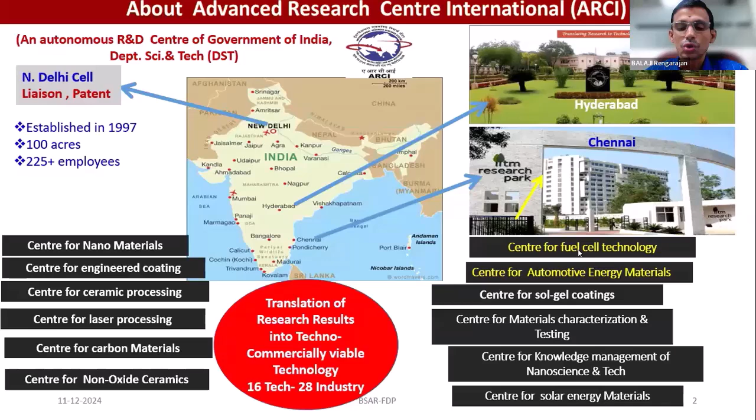Coming to our Center for Fuel Cell Technology, it is one of the Centers of Excellence of ARCI. Basically we are focusing on low temperature polymer membrane-based fuel cells for stationary and mobility applications, and another vertical we are working on is hydrogen generation through the PEM-based system. That is a major activity of our center.

Apart from that, as a kind of spin-off technology, we also work on hydrogen storage material development and metal air battery. So these are the major R&D activities taking place at our center.

Apart from that, we also have student internships as well as PhD research scholars. We take up every year depending on the project requirement, and we support them for 5 years with a full stipend, and they can register the PhD at any of the NITs and IITs in India. We have MOU with almost all the NITs and IITs in India.

So that they can register the PhD as an external candidate and work with us, and at the end of the 5th year they may have a degree from the IITs and NITs. So that kind of working model is also available, and many PhD students have obtained a PhD from our institution.

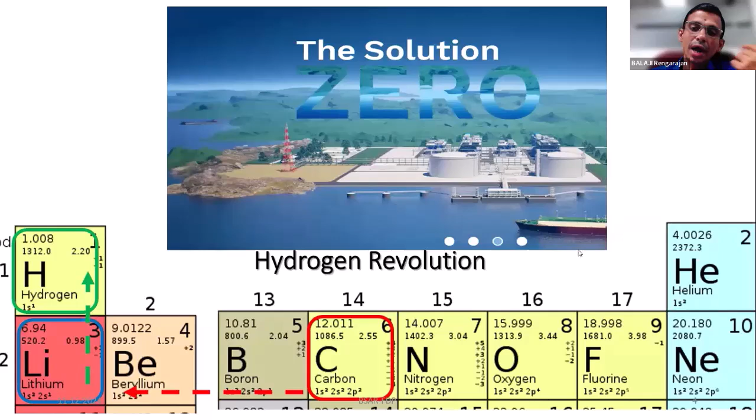Whatever power and water is input for the electrolysis, in the fuel cell, water and power are the output, with hydrogen and air as the input. So it's exactly the reverse of the green hydrogen electrolysis process. In that context, there is no carbon footprint, it is almost zero carbon footprint. That's why people are trying to move towards the hydrogen revolution and achieve the net zero target.

And recently we transferred two technologies to the industries as a component of fuel cell. Not only development of fuel cell, we also do field trials and demonstration programs almost all over India. So we have demonstrated up to 8 stationary applications and 2 transport applications.

And in fuel cell, you might have heard yesterday, the core component is membrane electrode assembly, which is the core component for fuel cell. We have very good infrastructure on developing this core component, and we developed more than 3000 MEAs, through which we can generate power of 0.2 megawatt, which has been tested for more than 8,500 hours, which is a unique number.

Because if you want to develop a technology, then ultimately we need to check the reliability and durability, endurance studies of the system which we develop. So we won't compromise on that particular aspect, and we do rigorous testing of our developed system.

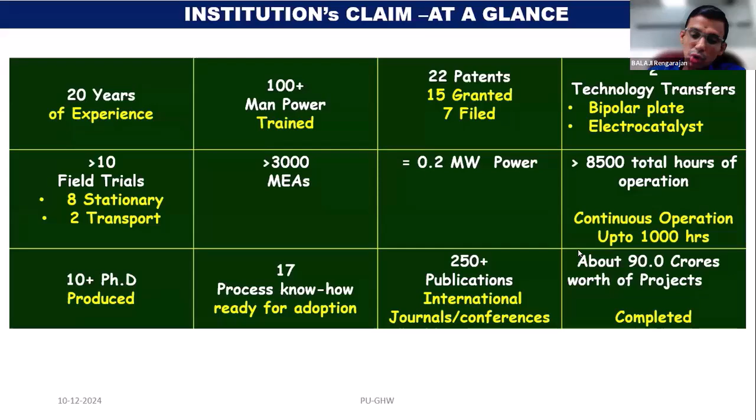And it has about 17 process know-how which we developed, and the patents and publications are quite numerous. We executed more than 90 crores worth of projects through it, in our journey over the past 20 years.

When we talk about hydrogen energy, the transition will not happen overnight. We can categorize the energy transition into 3 different scenarios: present, intermediate, and ultimate. Right now we deal with a fossil fuel based system like petrol, diesel, and natural gas. All those things are not carbon free, they emit greenhouse gases. But it's a kind of intermediate stage. We can look at electric and hybrid vehicles and synthetic fuel based vehicles, which can also generate power for stationary applications. But the ultimate objective of the entire world is to work towards hydrogen, which will have almost zero footprint when used in any kind of application.

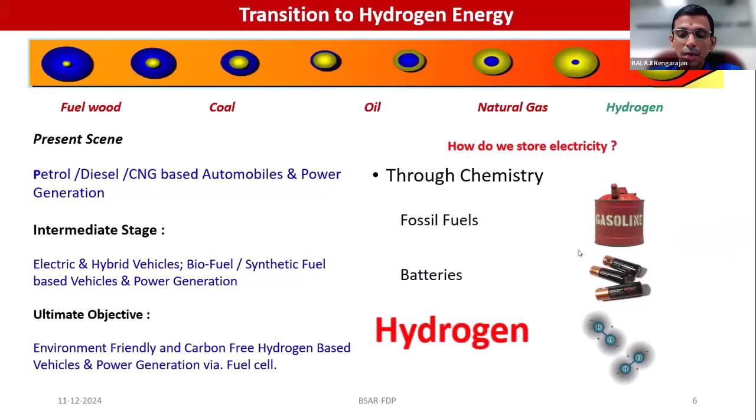But this transition won't happen overnight. All these energies are being stored through chemical reactions involved in the material aspects.

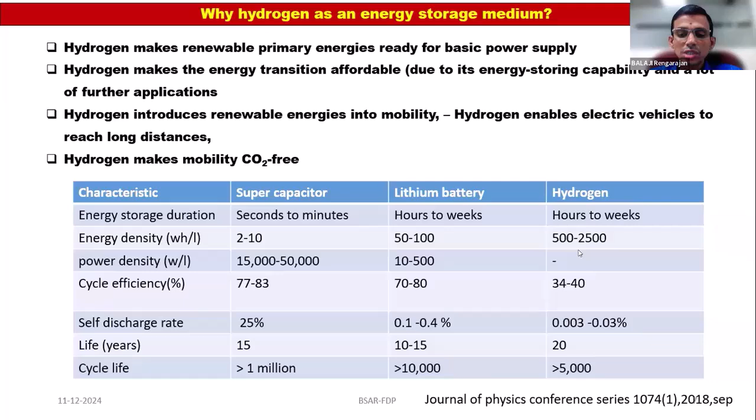So why do you want to go with hydrogen as an energy storage medium compared with other supercapacitors or lithium batteries, when we have alternative energy storage mediums? The main advantage is the energy density, which is higher than supercapacitors as well as lithium batteries. The cycle efficiency is slightly lower than supercapacitors and lithium batteries - I will talk about in detail in my subsequent slides why the cycle efficiency for the fuel cell is a little bit low compared with others. In terms of discharge rate, life, and cycle life, it's quite good, on par with supercapacitors and lithium batteries. So that is the drive for people looking towards this hydrogen-based economy.

When you talk about the hydrogen-based economy, there are 3 important steps which we need to consider. The fuel cell comes up with the utilization aspects, but before that there are 2 important steps: production and storage. These are the 2 important steps which we need to overcome if you want to use it in a fuel cell as hydrogen fuel.

When you talk about production, it is not an existing asset - it has to be generated from the electrolysis of water or some hydrocarbon. Hydrogen exists in the form of water or hydrocarbon, so you have to get the hydrogen from these 2 sources. Depending upon the feedstock and the method of recovering hydrogen, it is categorized into various types. Right now hydrogen is not new for the chemical industry, which widely uses it as a reducing agent. But when you want to use it as a kind of fuel, the demand is huge, and how you are going to handle the hydrogen when used as fuel, especially for stationary applications as well as long term storage - that is the one thing, storage is also equally critical in the case of hydrogen.

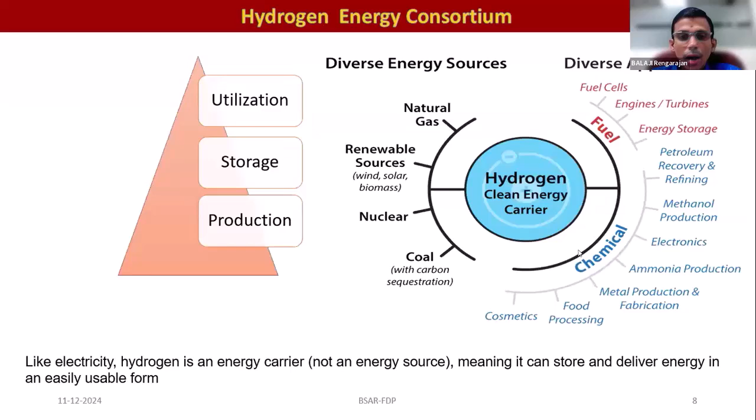These are the various hydrogen production steps based on the feedstock. Fossil fuel, if used as feedstock - especially natural gas and coal - we end up with a reformation process and gasification process, yielding hydrogen along with carbon dioxide. When you want to store this carbon emission, we have to adopt a carbon capture and storage system. If you use nuclear energy as input energy for getting hydrogen from water, there are two processes: thermochemical water splitting and high temperature electrolysis. These are the two steps available, but this technology is not highly matured because of some limitations.

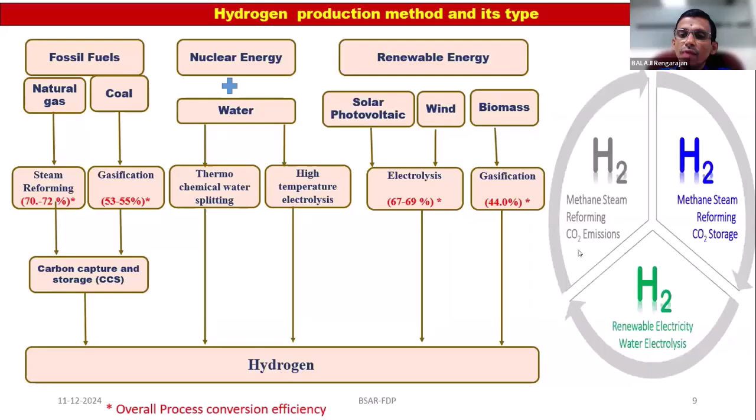That's why people are trying to use renewable energy as a source of electrical energy input for splitting water molecules. Using that electrolysis process, the efficiency is fairly good compared with the existing reformation process, and we can get pure hydrogen. This hydrogen is colorless, but depending on the type of method adopted and the emission of CO2, it is widely categorized as brown, gray, blue, and green. In the case of brown it is quite high, and in the case of gray it is a little bit lower because we use natural gas, which has less carbon - a one carbon system - so it ends up with low CO2 emission. When you adopt some kind of carbon capture and storage mechanism, it turns into blue. Finally, when you do electrolysis of water using renewable energy, we end up with hydrogen and oxygen - there is no carbon footprint, it is zero carbon. That's why green hydrogen is being considered as a viable alternative source for getting hydrogen without upsetting the environment, with zero carbon footprint.

So these are the major colors of hydrogen, being classified depending on the feedstock and the type of energy input which we are using.

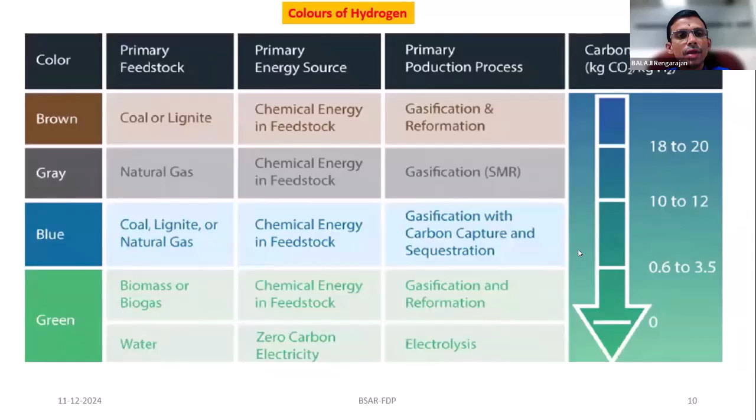The second important step is the kind of storage, because hydrogen is a very light gas, so it occupies more volume in cylinders if you want to store it. For example, if you want a passenger car run through a fuel cell, you need to carry about 5 to 6 kg of hydrogen in the cylinder.

The commercial cylinders existing in the market are basically low pressure cylinders where hydrogen is stored at 150 bar, and the cylinder water capacity in terms of volume is close to 45 to 48 liters, giving about half a kg of hydrogen in one cylinder.

Because of this high volume occupation, hydrogen has to be stored in a compressed manner, at elevated pressure, not just 150 bar. Maybe 300 or 700 bar is recommended if you want to handle a huge amount of hydrogen, especially for transport applications. But compression at elevated pressure is tricky.

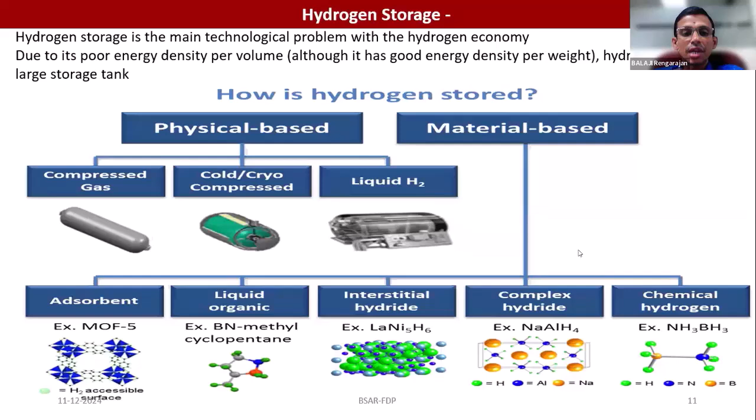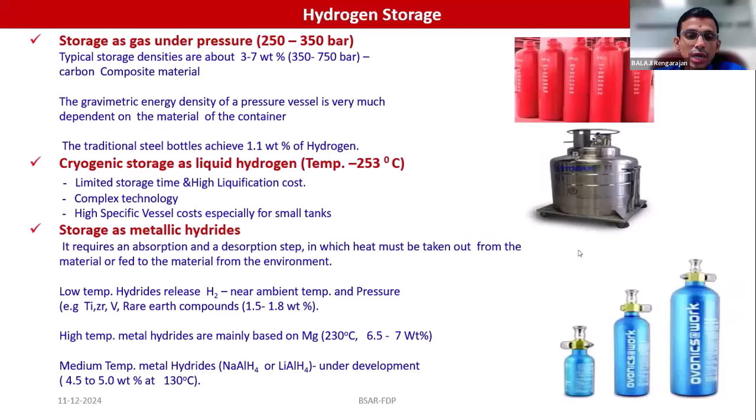So these are the points which we discussed in terms of storage at elevated pressure and cryogenic temperature, which is minus 253 degrees Celsius, so liquefaction is a cost-involved step. And in the case of metal hydrides, as I said, there are a few metals which have high affinity towards hydrogen, and they can store hydrogen up to 6 to 7 weight percentage.

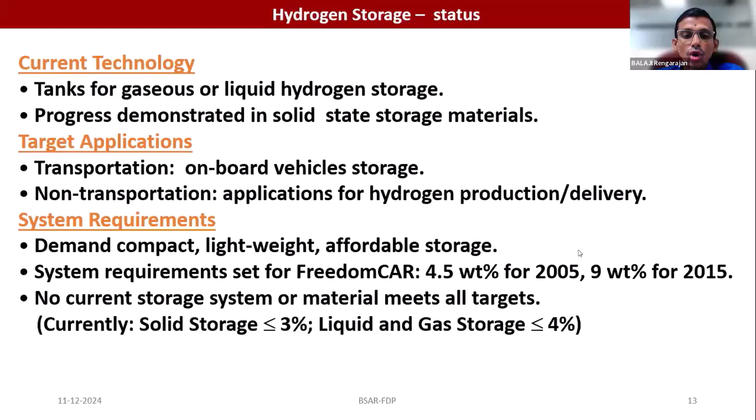And as I said, the current technology is storing hydrogen at high pressure using carbon composite cylinders. And there are a lot of R&D programs towards development of materials, increasing the hydrogen storage capacity much more than the recommended value, so that you can handle more hydrogen within a solid substrate.

So let us assume the hydrogen production and hydrogen storage steps are being addressed in parallel. We need to get power from the hydrogen, because electrolysis takes power and water as input, giving hydrogen and oxygen as output. If we assume that we address the electrolysis process economically, and that the hydrogen can be handled in a very good manner, whether at low pressure or high pressure,

we have to have a device which can convert hydrogen gas into power, that is called a fuel cell. Hydrogen can be directly converted to power in an IC engine, which is a well-demonstrated technology. But why go through the fuel cell route? The energy conversion efficiency from hydrogen to power is much higher than any other energy conversion device available. That's why the fuel cell route is recommended to convert hydrogen into power.

And reliability and response are the two important factors when you want to employ any energy storage device in onboard transport applications. The reliability and the response time have to be high. So considering these major parameters, the fuel cell is considered the best choice for conversion of hydrogen into power.

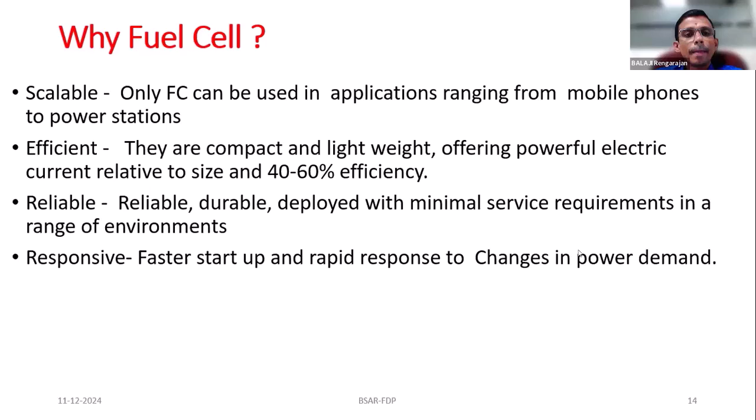So when you talk about hydrogen fuel cells, basically it's an electrochemical system. You need to have a positive and negative electrode, and you must have an electrolyte. Any electrochemical system can operate at a different temperature range, and in the case of fuel cells it is the same. Depending upon the type of electrolyte employed for the conduction of proton or anion, and the operating temperature range, they are categorized as low temperature, solid oxide fuel cell, molten carbonate, phosphoric acid and direct methanol fuel cell.

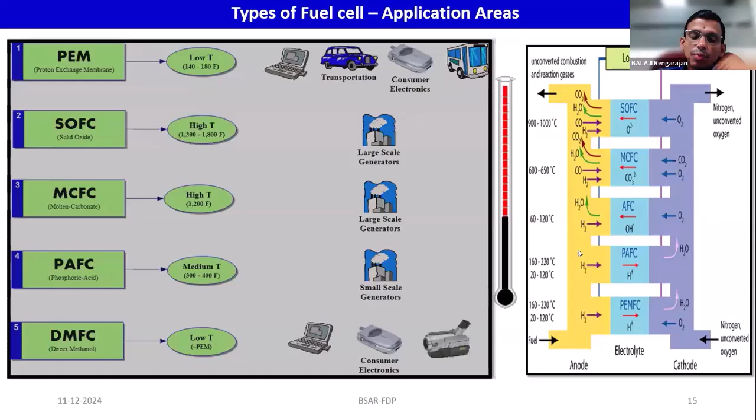Depending upon the operating temperature, the polymer membrane-based fuel cell is considered the preferable choice for both stationary and transport applications. You cannot employ the high temperature solid oxide fuel cell onboard because it needs to handle about 1000 degrees Celsius, which is very difficult for transport applications. So it is meant only for stationary applications. Considering its low temperature operation, the polymer membrane fuel cell is considered a viable tool for both stationary and transport applications.

So why, compared with the other types of fuel cell, is the PEM fuel cell getting importance? Because of fast startup time. As soon as you pass hydrogen gas into the anode compartment and air into the cathode compartment, immediately you will get an open circuit voltage and it will start powering the device. And it has fuel flexibility, and you can make a very compact fuel cell.

Even if you want to make a 100 kilowatt system, it won't occupy much space because of the anode and cathode interelectrode distance and the type of electrolyte. Here we are not using any liquid electrolyte; we are using a solid electrolyte called a polymer electrolyte membrane or proton exchange membrane, which takes care of the ionic transport between the electrodes, and these are all a few microns thick.

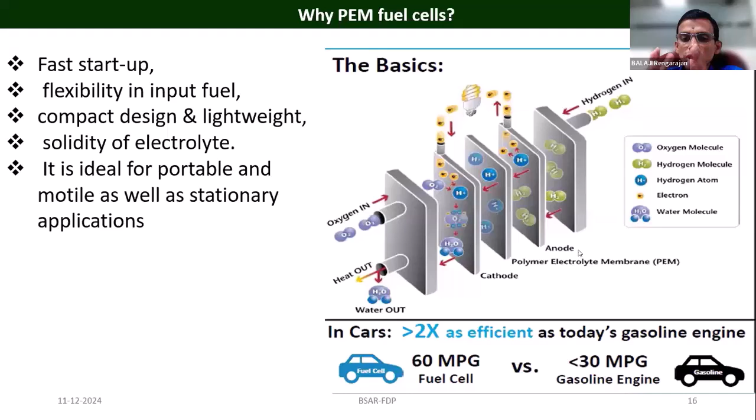Each cell will produce 1 volt. Depending upon the voltage, current and power requirement, you can configure the cells in parallel or series mode so that you can deliver the required power. So these are very compact, and you can multiply the number of cells so that the required power can be met. So it is scalable and compact, and that's why it is ideal for both stationary and transport applications.

So there are major important components which you might have heard from our earlier colleague Rahman. Yesterday he might have briefed about the importance of various components in the fuel cell assembly, like a carbon substrate, which is acting as a substrate material for catalyst loading. The electrocatalyst is basically a platinum based catalyst, which is supported on the carbon, and when you want to make a membrane along with the electrode, that is the membrane electrode assembly, the core component for the fuel cell, as we have shown in this picture.

The next important component is a kind of flow field plate, which will act as a current collector, as well as facilitate the reactants, hydrogen and oxygen, to the respective electrodes. So these are the major stack as well as system components when you want to make a device of PEM fuel cell.

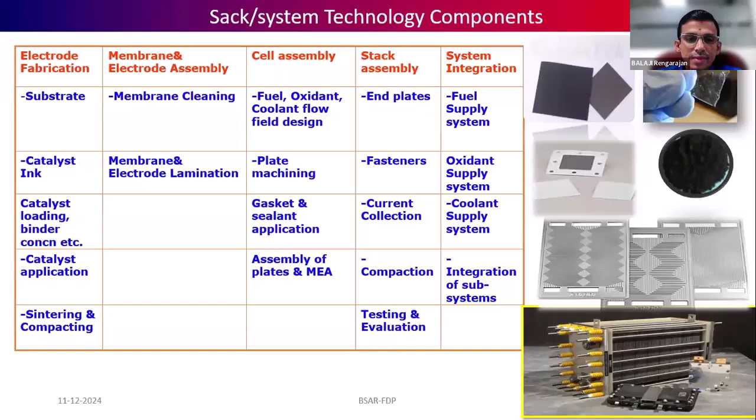So as I said, when you talk about the system, obviously we should end up with the reliability and how it is functioning. The function of the fuel cell depends on each component. It's not only a single component; it's a membrane that acts as an electrolyte, and the electrodes, this precious metal catalyst coated on the carbon substrate, and it has to also allow the various gases, hydrogen as well as air, into the respective electrodes.

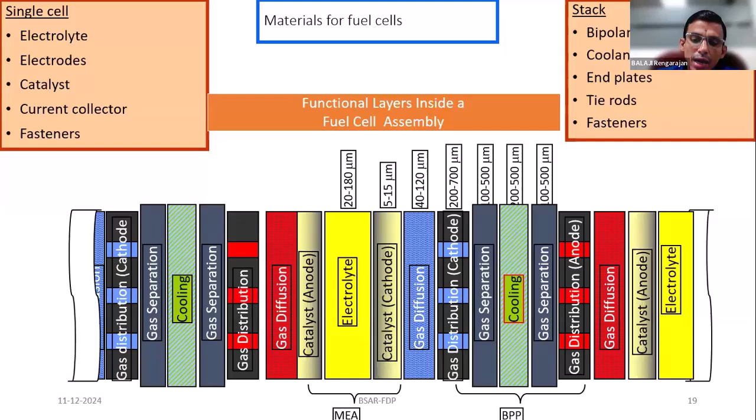And if you see the thickness of each layer, it's in the micron range, ranging from 20 micron to 500 micron. So these are very crucial when you want to make a device. We need to concentrate on each component's development so that you are able to achieve the required power. And the function of each component is different.

And the response for each phenomenon, especially the moment you pass hydrogen and air into the stack, there's a kind of delay in milliseconds for obtaining the open circuit voltage, because an electrical double layer has to be formed between the membrane and the electrode, and gas diffusion has to take place, because the carbon substrate has to be porous. Only then can it easily facilitate the transport of gas molecules from the external environment to the electrocatalyst surface.

And as I said, apart from the power production, water is also one of the byproducts in the fuel cell. So you need to effectively handle the water. Otherwise, if you do not effectively evacuate the water from the system, it will create flooding, which will slowly degrade the fuel cell performance. So all these phenomena will happen from milliseconds to microseconds and seconds, and even in terms of months and days.

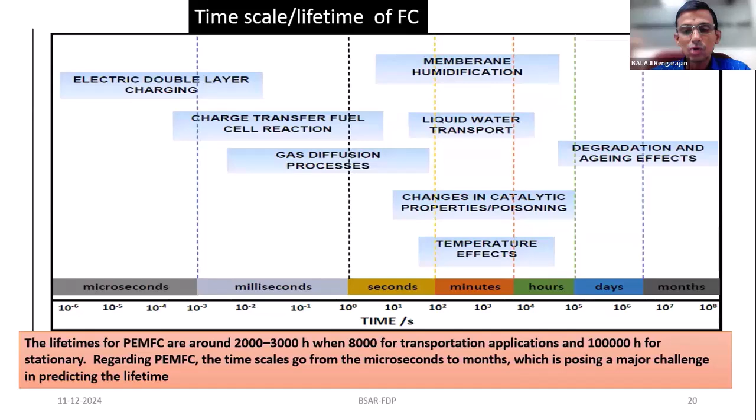So if you want to ascertain the durability of the PEMFC, multiple parameters and multiple component functions have to be addressed. Only then can you arrive at conclusions on the durability of the PEMFC stack. So as I said, water is also produced as a byproduct apart from the power generation.

In the case of the polymer membrane, this membrane will act as an electrolyte as well as a separator, because the hydrogen and oxygen or air should not combine directly. It will create a kind of burning. Direct burning should not happen; it should happen in a controlled manner, and they should not mix with each other. So this membrane acts as a gas separator between the different compartments, and it also acts as a proton exchange between the anode compartment and the cathode compartment. This is a kind of electrolyte, which takes care of the ionic movement between the electrodes.

Proton conduction is effective only when the membrane is fully hydrated. So the membrane always has to be in a wet condition so that effective proton transport takes place between anode and cathode. But at the same time, if you allow more water retention within the system, it will create flooding in the entire system. So you must have effective water management within the fuel cell stack, otherwise it will degrade the fuel cell performance. Water has to be there, but it should not exceed the limit. You have to constantly remove the water produced at the cathode compartment.

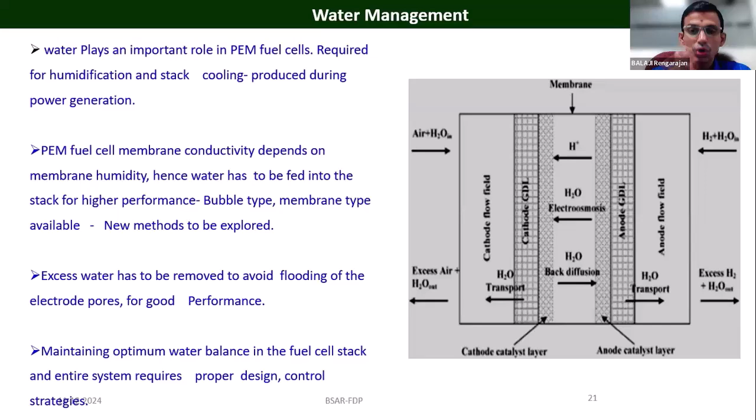So effective water management is one of the key steps which we want to consider while developing a fuel cell stack. Apart from water management, there is another aspect of thermal management, because the conversion efficiency of hydrogen to electricity is about 40% and hydrogen to thermal is about 40%. So the overall conversion efficiency is 80%, but 40% goes to electrical energy and 40% goes to thermal energy. But this thermal energy is a kind of low grade heat because we are operating much lower than 100 degrees Celsius, around 50 to 70 degrees Celsius. So it's low grade heat, which cannot be used apart from room heating purposes.

But at the same time, if you do not effectively remove the heat from the system, then obviously the membrane will get dehydrated. If the membrane gets dehydrated, then the proton transport will not occur, and a performance loss will be seen. So effective thermal management, that is cooling, whether it is an air cooled system or a water cooled system, which are widely used for the PEMFC system, is also crucial when you want to develop a fuel cell stack.

So if you want to make a 1 kilowatt fuel cell stack, it will also generate 1 kilowatt of heat. So whether it's an open loop system or closed loop system, depending upon the application, we have to choose water or air as the coolant, and you must have a proper cooling loop so that the heat will be effectively removed from the fuel cell stack.

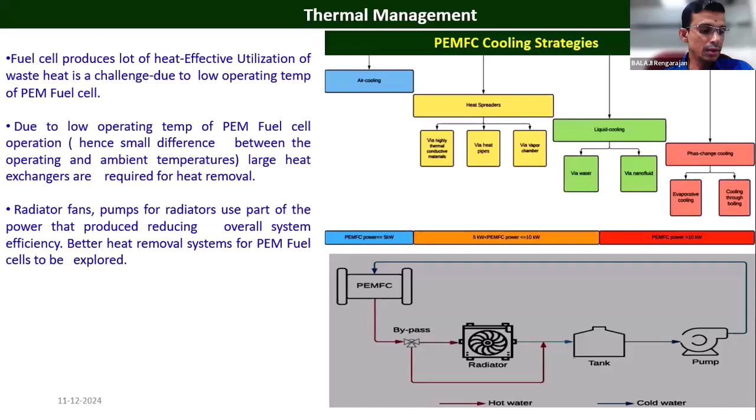And as I said, when you want to ascertain the performance and durability of the fuel cell stack, there are various phenomena taking place. One is flooding, which we discussed. When you are not removing the water effectively, it creates flooding and fuel starvation. Because when you draw more load from the fuel cell, the hydrogen and air consumption at the interface will be more, so the rate of consumption should be effectively replenished. Otherwise, fuel starvation will occur. If fuel starvation occurs, there is a lot of fluctuation in the voltage that reflects in performance deterioration.

And if you don't give enough fuel supply, then because of the fuel starvation, the cell will act in the reverse direction. It will act as a kind of electrolyzer. Positive will become negative, negative will become positive. A kind of cell reversal will happen. So that also contributes to the fuel cell loss in performance.

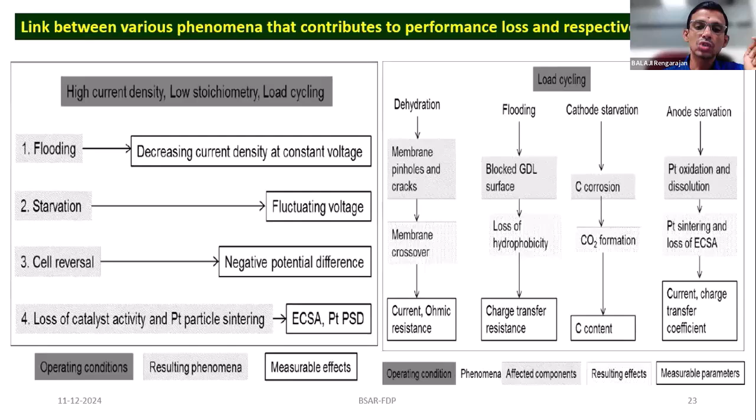And over a period of time, because we are using nanocarbon or nanoplatinum as an electrocatalyst, because of the fuel starvation, cell reversal and flooding, these nanoparticles will get agglomerated and become bulk particles, and that also leads to a loss in performance. So these are the various phenomena which contribute to the performance loss of the PEMFC stack. So we need to take care of all four aspects so that we can operate the fuel cell stack effectively for a longer duration.

So as I said, the fuel cell will produce DC power. When you want to make any application-oriented thing, it has to be converted into AC. So developing the power conditioner, whether it is DC-DC converters or DC-AC inverters, is also crucially important. We may think that the inverters and converters which are available for the battery can be directly used for the fuel cell, but the case is not the same, even though the battery produces DC power and the fuel cell also produces DC power.

But the battery is meant for low current and high voltage operation, whereas the fuel cell is operated at low voltage and high current. So the power electronics is entirely different when you want to develop a power conditioner for the fuel cell in order to get a stable voltage from it. Because the open circuit voltage of the fuel cell is close to 1 volt, and the moment you draw the load, the voltage will drop down to 0.5 or 0.6.

So this 1 volt to 0.6 per cell transition will happen in milliseconds or microseconds actually. So when you have 100 cells in series, consider this 100 volts as the open circuit voltage, and if you draw load suddenly and want to operate the fuel cell at 0.6 volt per cell, the overall stack voltage will become 60. So the voltage transition from 100 to 60 will happen in microsecond and millisecond duration.

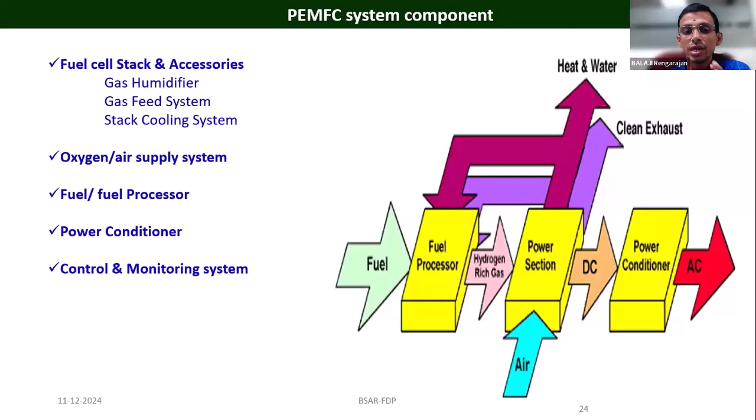So these are the main criteria. When you want to develop a PEMFC system, not only a stack, apart from the fuel cell stack, the fuel processor, that means getting hydrogen from the source, and the power conditioner, whether we want DC or AC, as well as the control and monitoring system, all together form a PEM fuel cell system for any stationary or transport application. So considering that, this is the typical flow chart on developing a PEM fuel cell testing system.

So if you want to test the fuel cell, these are the basic required components, like a mass flow controller, which will take care of the controlled flow of fuel as well as air to the stack, and humidification, because as I said, the membrane has to be always hydrated. If you pass dry hydrogen to the fuel cell, that will also contribute to performance deterioration. So it is better to pre-humidify the hydrogen gas.

So you have to have a controlled humidification temperature for the hydrogen to be humidified, and the humidified hydrogen has to be passed through the fuel cell. So the humidifier, mass flow controller and the load, whether it is a DC load or AC load, have to be in place so that the fuel cell testing can be performed without any difficulties.

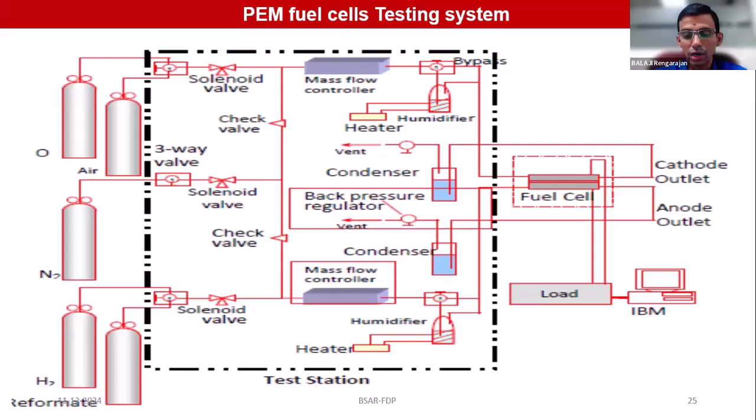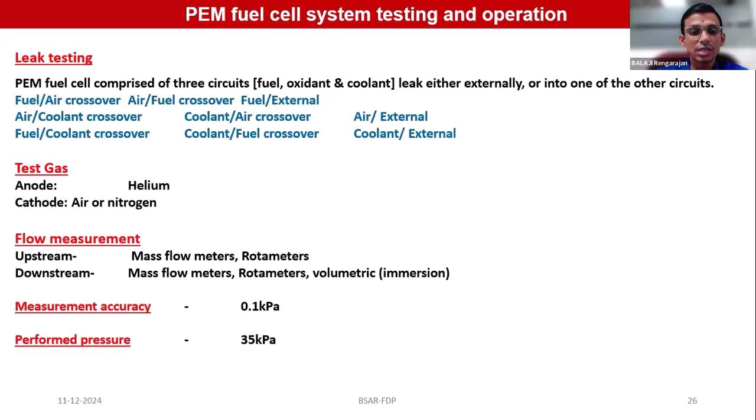And as I said, you are handling hydrogen and air in two different compartments. Obviously, we have to ensure the leak test, because when you pass hydrogen in the anode compartment, it should not come out in the cathode compartment. So we have to ensure no leak in the entire PEMFC system. The same is the case for the air. If you pass air at the cathode side, it should not come out at the anode side. So leak testing has to be done before it is used in the field.

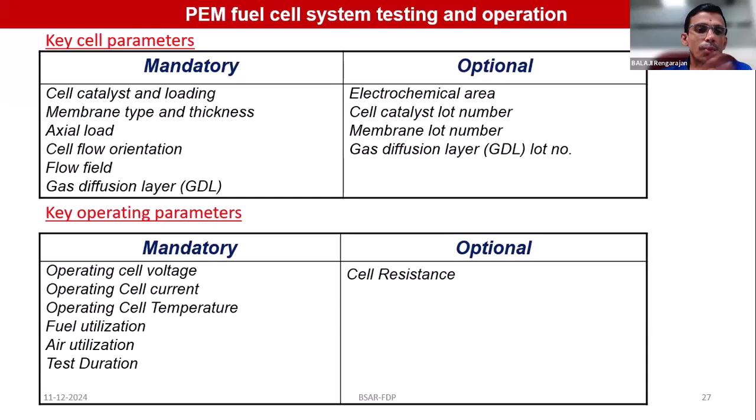Because say, for example, theoretically 12 liters per minute of hydrogen is required if you want to operate a 1 kilowatt fuel cell. In some cases, if there are any velocity distribution problems or pressure distributions, and in terms of flow restriction, there may be a slight increase in fuel utilization. So the fuel utilization, air, and how long you are going to operate. These are the very important key parameters in terms of operational aspects.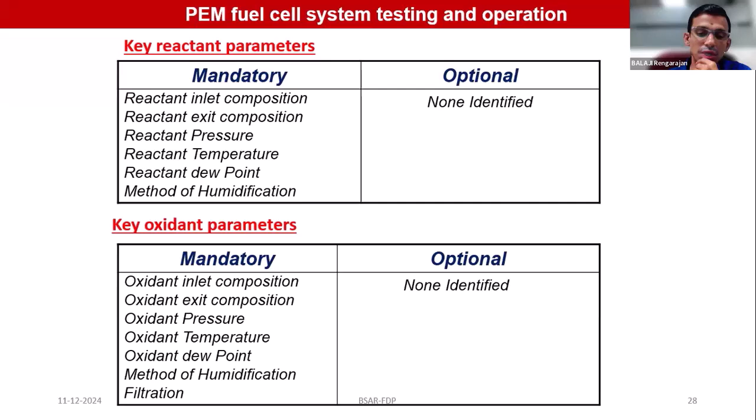And these are the reactant aspects as well as oxidant. The purity of the hydrogen gas and purity of the air, we must be aware of these parameters, right: what is the inlet composition, what is the inlet pressure of the hydrogen, and what is the humidification dew point of the hydrogen, because it has to be humidified. So what is the dew point temperature of the hydrogen gas? The same thing is applicable for the case of air. All those are key mandatory parameters which we must be aware of, and a log book is essential before you test a fuel cell stack, actually.

And apart from the fuel and reactant, there is a coolant, because as I said, air or water is the coolant. So the water conductivity should be very, very low. Otherwise, the shunt current will be more because it's circulating through the cells, so obviously it can carry some kind of current. To avoid the shunt current, it is better to use very pure water, DM water, and what is the flow rate and the pressure, because if you want to effectively remove the heat from the system, the effective flow rate has to be ensured; only then can we remove the heat being produced along with the power.

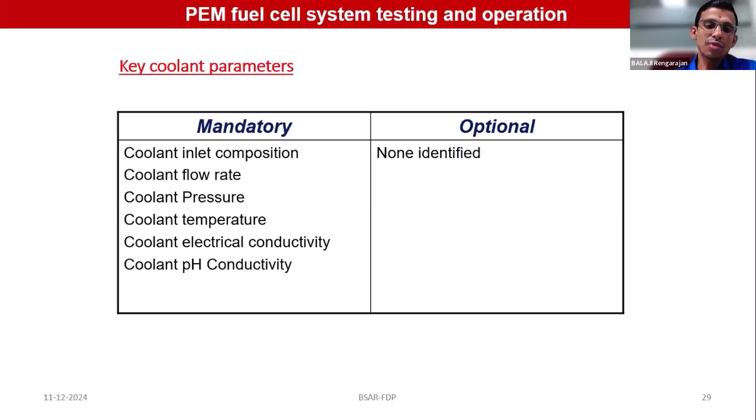And the conductivity of the water should be very, very minimum, and it should be neutral; it should not be acidic or alkaline. If you use some kind of acidic or alkaline based water, then it will start corrosion of the carbon material or metal connectors which we employ in the fuel cell stack. So these are the very key parameters in terms of coolant aspects apart from the fuel and reactant aspects actually.

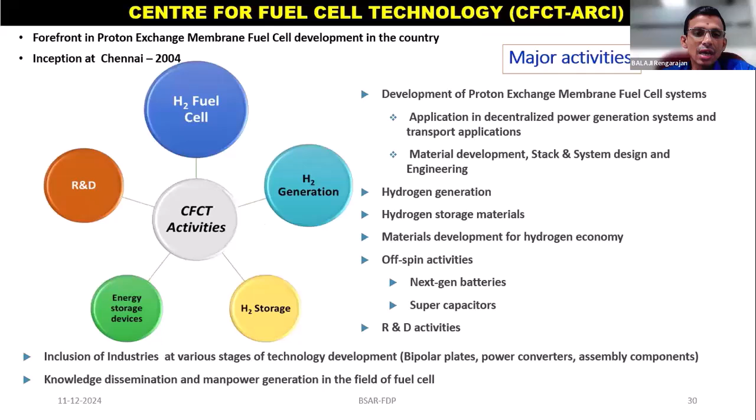So far, this is the overall view of how to handle the fuel cell stacks, how to test the fuel cell, what are the important components and the role of each component, and how we can ascertain the fuel cell performance. So these are the major activities, as I said earlier, of our center, and this is our technology pathway adoption.

We also do research on development of materials and components apart from the commercially existing materials and components for the fuel cell. But that will happen at a low tier level, because we cannot build a high kilowatt stack with a material which we are developing, because it requires huge numbers. So if we want to develop a fuel cell stack in higher capacity, we will start with a commercially available material, and we will make our own components like gas diffusion layer, membrane electrode assembly, and subsequent cell arrangements and stack fabrication. All those things will happen with a commercial material. That is one of the pathways.

The next pathway involves developing alternative materials to commercial materials. If the performance is good or on par with commercial material at a smaller scale, then we consider scaling up the material we develop. So this is a two-way mechanism for adoption of technology.

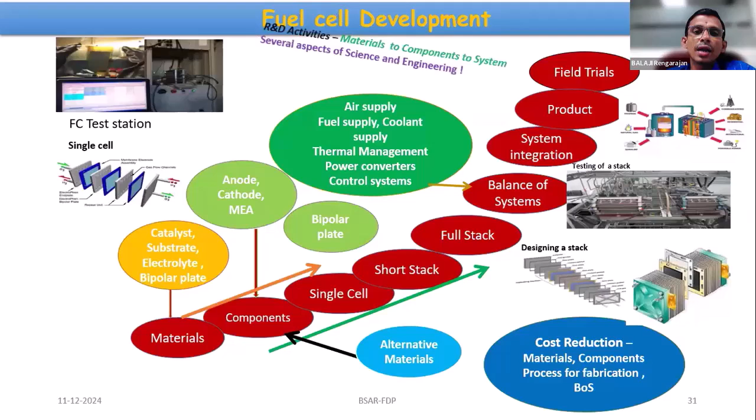Once we develop a full stack, the fuel cell requires other balance of system (BOP) components. So we also concentrate on developing air supply systems, hydrogen supply systems, coolant supply systems, and power management systems. We develop a required and customized BOP system for the entire PEMFC stack. Once the BOP is integrated with the fuel cell, we employ the entire system as a product and do field trials to validate the developed system.

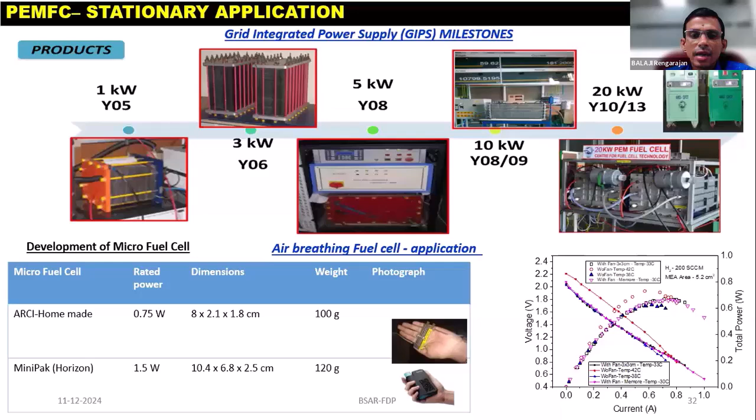With this pathway, we were able to develop stacks ranging from 1 kilowatt to 20 kilowatt capacity over the entire period. These are some of the stacks we developed in our centers, and their performance has been highlighted. These stacks are meant for stationary applications, where volume and weight of the stack are not big constraints.

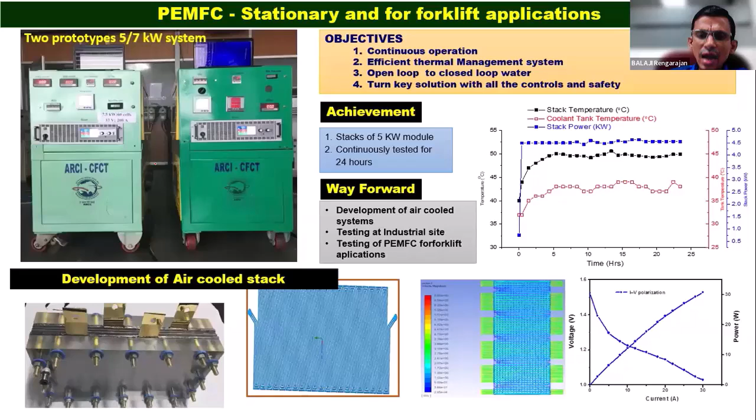Once we develop a stack, wherever hydrogen is available, we perform field trials. We did field trials with Neyveli Lignite Corporation and Gas Authority of India Limited (GAIL), where they have hydrogen as fuel. They use hydrogen as a coolant in their power plants, same with GAIL. If they have excess hydrogen, they want to power their premises through fuel cell. So we collaborated with them and installed our PEMFC stack there, delivering 5 to 7 kilowatt power, which was widely tested, and we were able to power the premises through hydrogen fuel cell.

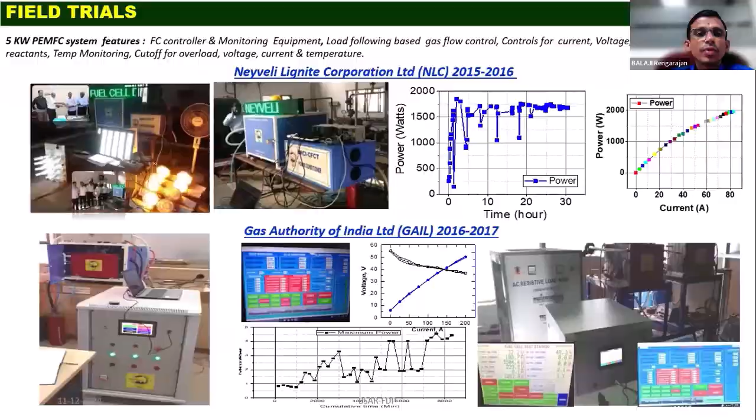Apart from GAIL and NLC, we also did a demonstration with Bhabha Atomic Research Centre where they have hydrogen. We developed a system for them and demonstrated it for stationary application.

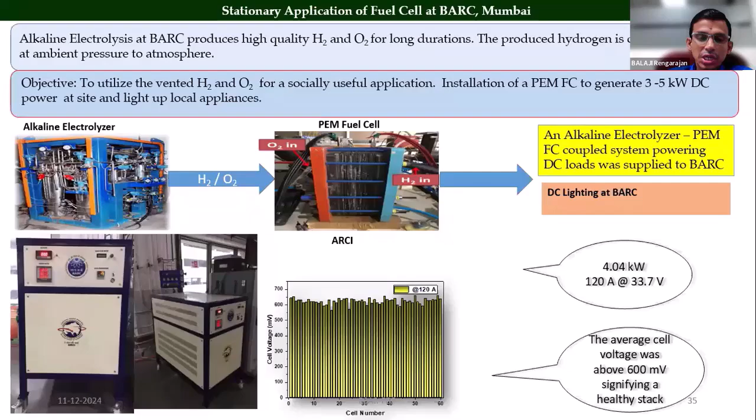Apart from stationary applications, we thought of using these fuel cell systems for disaster management. As part of that, we carried hydrogen cylinders in a truck along with the PEMFC systems, and wherever power was required and grid power was not available, we fueled our PEMFC stack through the hydrogen cylinders and demonstrated 5 to 7 kilowatt or 10 kilowatt capacity wherever grid power was completely absent.

We also demonstrated this for the Tamil Nadu government when Radhakrishnan was head of disaster management. We did a demonstration of the hydrogen truck, which had hydrogen cylinders and the entire PEMFC system, to power some of their premises.

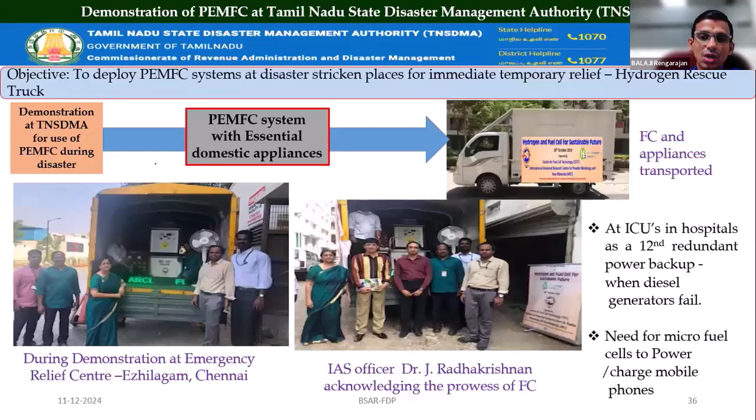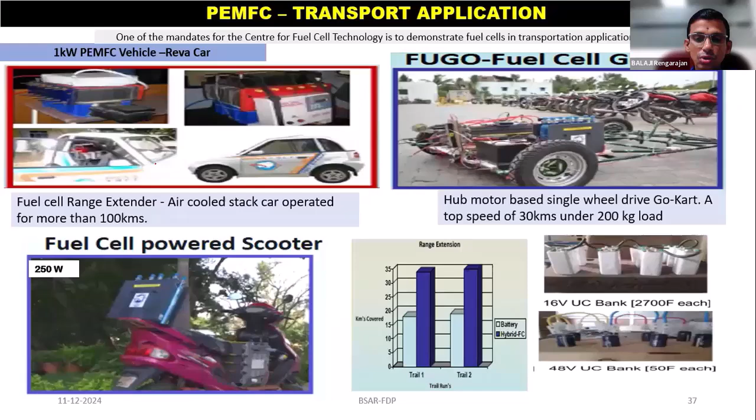These are the stationary applications we carried out. Apart from stationary, we also did demonstrations for vehicles. It's not a fully fuel cell powered vehicle, but a kind of range extender with a small battery. With the fuel cell, range can be extended, which was demonstrated for the Reva car as well as fuel cell powered scooters. We have small hydrogen canisters onboard so we can achieve the range we want.

Apart from the small Reva car and scooty, we also did a demonstration for transport applications, especially for the Mahindra Bijlee, which has 3 kilowatt and 5 kilowatt systems. You can find commercial hydrogen cylinders here next to the driver's seat, carrying 150 bar, because at that time we could not have composite cylinders handling 700 bar pressure, and even the Indian government does not give license to handle hydrogen cylinders more than 200 bar even now.

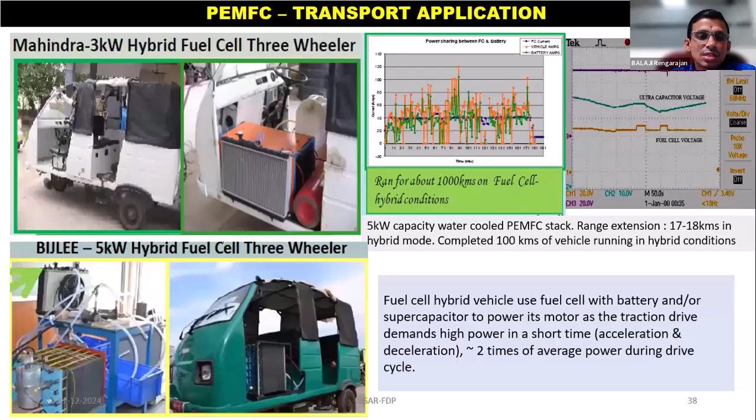So we did a kind of demonstration. We carry the commercial hydrogen cylinders onboard, and with our fuel cell and the entire cooling management system, we were able to run these vehicles near the IIT campus.

With this experience of developing a fuel cell stack and other BOP components tested for stationary and transport applications, we found that making the component and stack involves huge steps—more than 45 steps to make a material into a PEMFC stack. Earlier, we tried to make this component and stack assembly with about 30% of steps automated and 70% done manually. So we thought that if you want to make the technology commercially available, the technology adopter must realize how we can scale up the technology development and fabricate the PEMFC component in a faster manner.

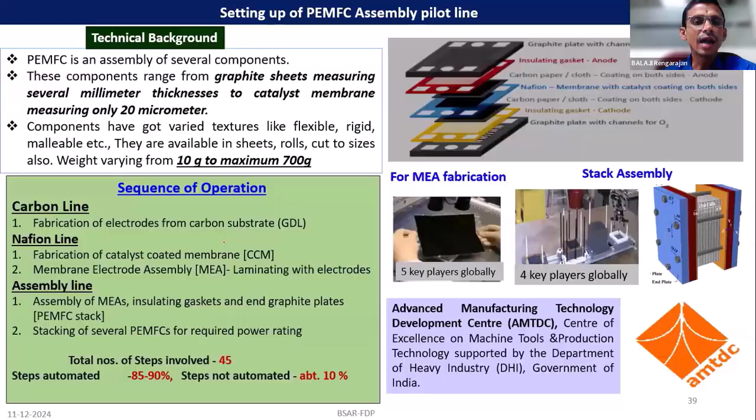With that objective, we started to establish a complete automation line for developing a fuel cell component as well as fuel cell stack assembly. This is one of the first attempts in this country, and we successfully developed a PEMFC fuel cell stack fabrication pilot line in our premises. You can find various processing equipment, and all the processing parameters are controlled through SCADA—it is a completely automated system, and each component is precisely fabricated so that the accuracy and endurance of the fuel cells can be extended.

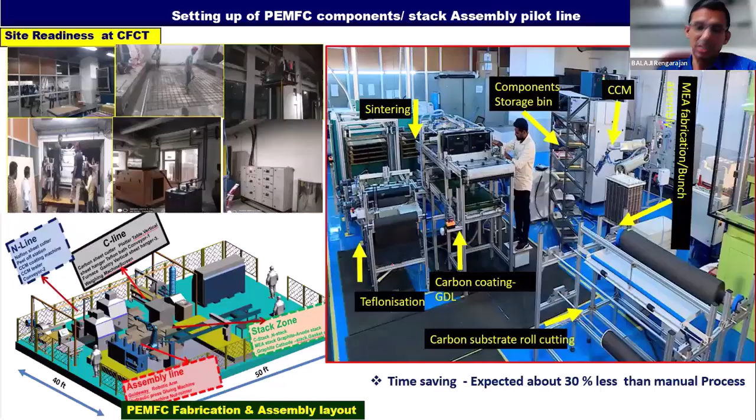Apart from establishing the PEMFC automation line, we also try to demonstrate fuel cell applications for real use cases. One objective is that telecom towers are currently powered through diesel gensets when grid power is not available, and there is a government mandate requiring them to use their own power. Because of this influence, we are now trying to put our fuel cell stack as a kind of backup power for telecom tower applications.

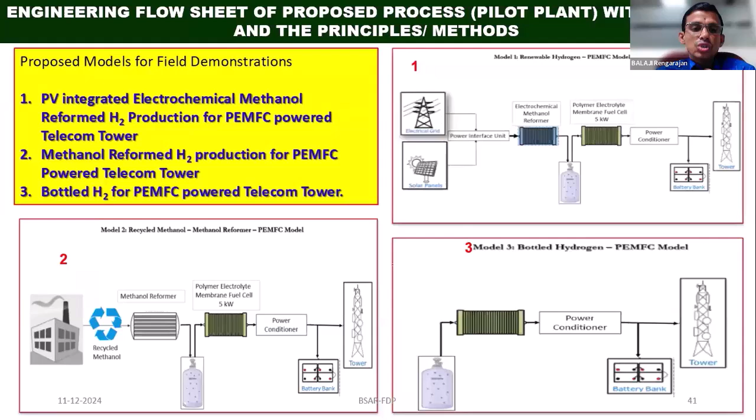We also try to find a source for hydrogen since we have hydrogen electrolyzers. We electrolyze and produce hydrogen on site and use it in the fuel cell to power the telecom tower, ranging from 3 to 5 kilowatts. It's a complete hydrogen supply chain: you get power from renewables, run the electrolysis process to get hydrogen, store it, and use it in the fuel cell to generate power again. Whenever the grid power or other power source fails, the fuel cell automatically turns on and provides backup power for the telecom tower. That is a major ongoing program we are engaged in, using fuel cell powered telecom tower applications.

In terms of transport application, that is completely hydrogen fuel cell powered vehicles. There are major components—apart from the fuel cell, any fuel cell vehicle must have a small battery which takes care of the power conditioning and the initial power requirement of the components. The fuel cell and battery work together to stabilize the power coming out of the fuel cell, and through inverters it feeds the traction motor, which finally drives the vehicle. As mentioned, we need a proper coolant mechanism, mostly a closed loop system, which is required for vehicle applications.

You need a proper radiator—small and compact. As I said, when developing a balance of plant for the fuel cell, the main criteria is compactness: it should be very compact but at the same time have low power consumption. For example, if you are developing a 1 kilowatt fuel cell powered through hydrogen, the BOP component power should be less than 10% of the total power.

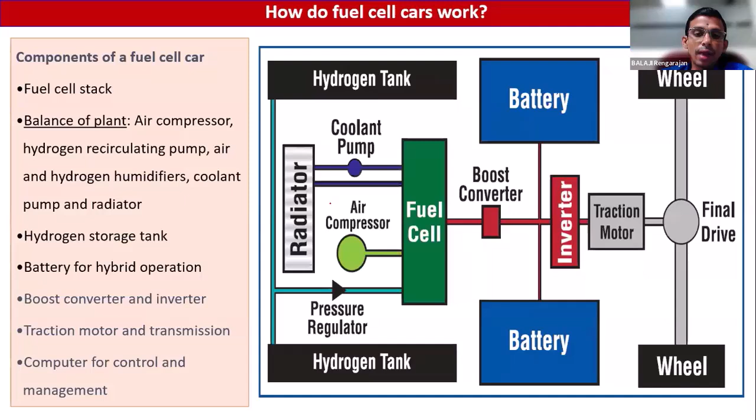Identifying a low power consumption air blower, radiator, and pump is crucially important when developing a PEMFC system, because low power consumption blowers, radiators, or motors are often not readily available. So when designing an entire PMFC system—say for example 5 kilowatts—only about 500 watts of power should be used for parasitic power consumption. That is one of the major points to keep in mind when developing a PMFC system for stationary or transport applications.

There are two kinds of configurations normally employed in fuel cell vehicles: series hybrid and parallel hybrid. In series hybrid, there is a small fuel cell and large battery bank, whereas in parallel hybrid it's reversed. They have a large fuel cell which takes care of 80 to 90% of the power requirement for the vehicle application, and a small battery bank which takes care of powering the BOP component and other control systems.

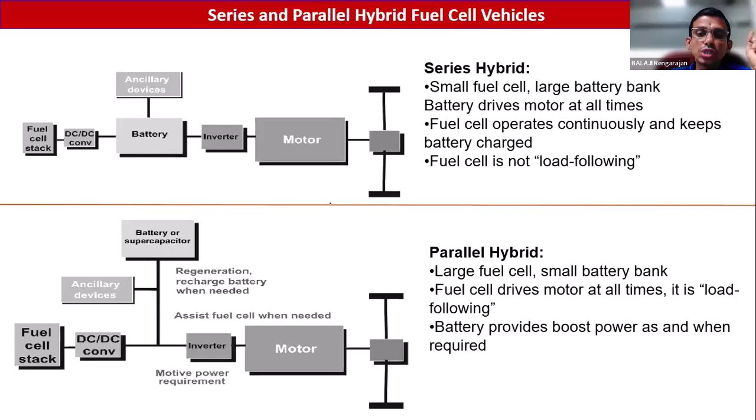Toyota Mirai, which is widely used as a fuel cell vehicle, is configured through this parallel hybrid configuration.

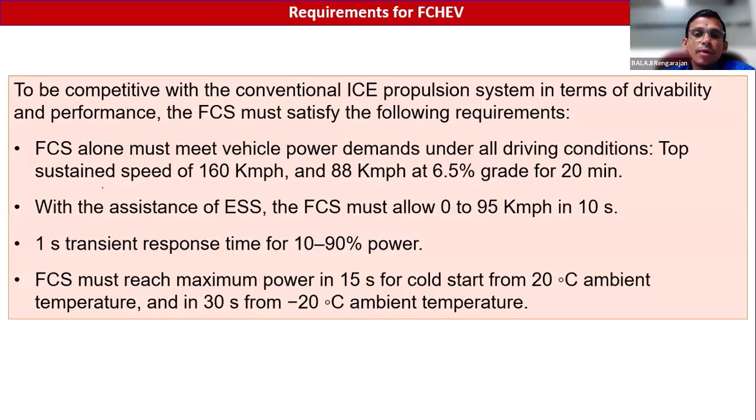When you want to develop a fuel cell vehicle, these are the key requirements. One is the response and proper handshaking between each component, and the transient response should be 10 to 90% power within a second. So the response of the power conditioner and other components is crucially important when developing a fuel cell powered electric vehicle.

These are the key components for fuel cell electric vehicles. The hydrogen cylinders need to store hydrogen at 700 bar, and the cylinder should be lightweight, made up of carbon composite cylinders. The nozzle, especially for dispensing hydrogen gas to the fuel cell, is also equally important, because you need to handle hydrogen, so the CNG nozzles may not be suitable.

So you have to reconfigure the nozzle for dispensing hydrogen, and the cooling system, which effectively removes the heat from the fuel cells, and the power conditioner, as we discussed - DC-DC converters and DC-AC inverters - are also crucially important when making a fuel cell electric vehicle.

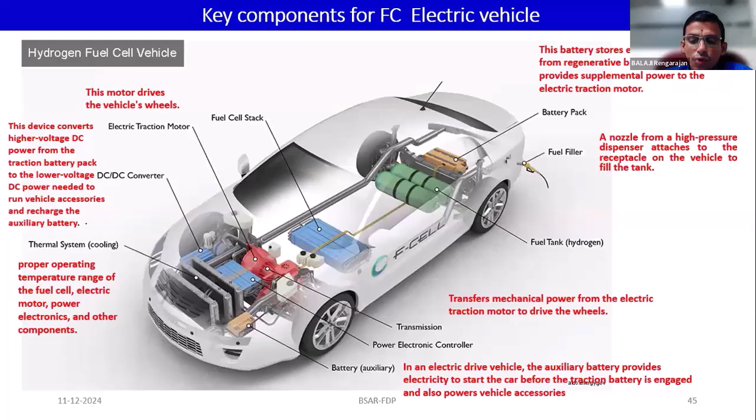There's a comparison: when we have lithium-ion battery vehicles onboard, why do you want to go with fuel cell electric vehicles? There are three key parameters to consider: price, range, and time to refuel.

Right now, fuel cell hydrogen vehicles have a high price because of low volume of usage, but that can be reduced when you increase the market and increase the volume.

If you see the range, it can handle up to 400 to 500 kilometers when you carry about 4 to 5 kg of hydrogen using high composite, high pressure cylinders. And the time for refueling hydrogen is very less - like CNG, you can refuel the vehicle within 3 to 4 minutes.

Whereas in the case of electric vehicles, the time to recharge is high, and there is range anxiety which cannot be avoided - we cannot extend the range. Electric vehicle cost right now is low because of high volume.

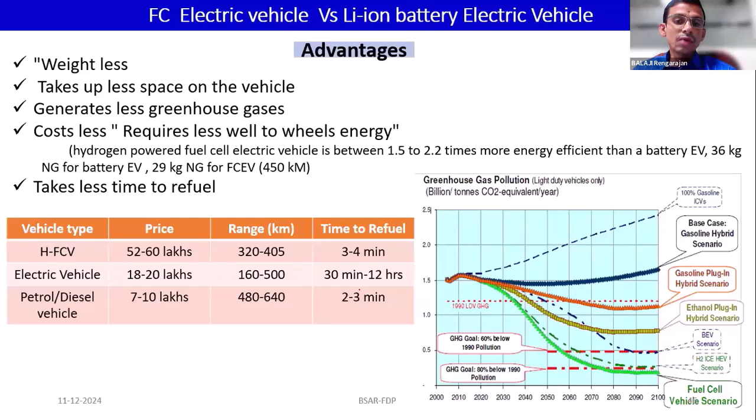When compared with petrol and diesel, the cost of fuel cell vehicles can be considerably brought down when you increase the volume and mass, and the range is on par with fossil fuel based systems, and the time to refuel is also on par with the fossil fuel system. That's why, compared with battery based electric vehicles, fuel cell based electric vehicles may gain importance in the future.

Though the technology has been demonstrated widely for commercial applications, there are some challenges in terms of cost, because we are using precious metal catalyst and the membrane, which are also cost components, and the bipolar plate, which facilitates gas molecule distribution among the fuel cell electrocatalyst. So all these are very costly components.

That's why the DOE has set a target of $30 to $40 per kilowatt. Right now it's about $200 to $250 per kilowatt, so there is scope for improvement while developing novel materials.

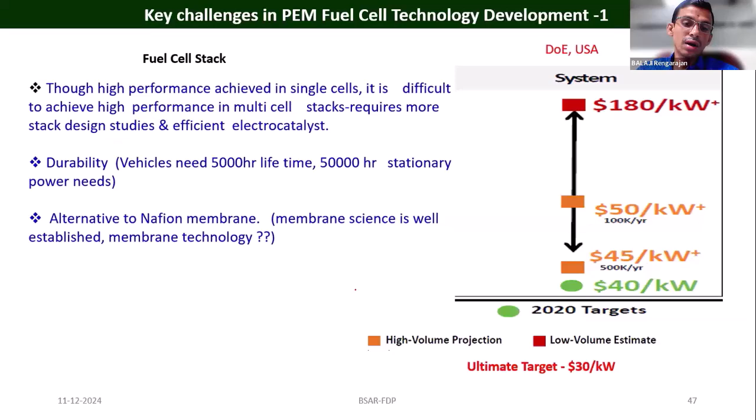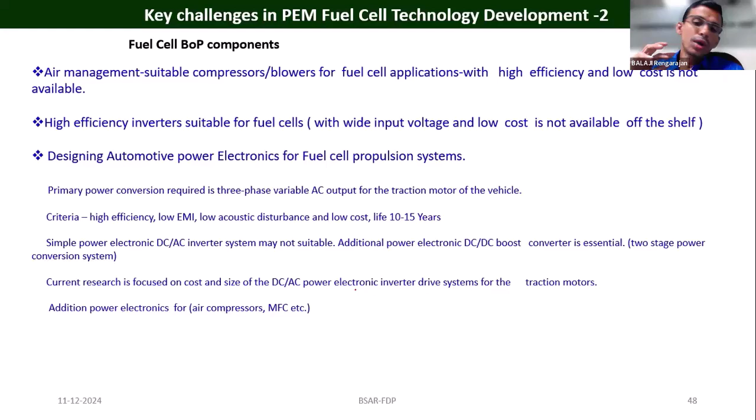So the cost can come down, and the BOP components are equally important, not just the stack. When you talk about the system, the development of balance of plant components - like low power hydrogen supply systems, low power blowers, and low power effective DC-DC converters with high efficiency - all these BOP components are equally important to develop, apart from the fuel cell stack.

Though fuel cell stacks and fuel cell vehicles are ready, we need the required infrastructure, otherwise the fuel cell vehicle will not take off. So fuel infrastructure, like petrol pumps, must have hydrogen dispensing stations.

Right now, we are able to see many more CNG-based petrol pumps, but like that we need to have hydrogen filling stations widely so that fuel cell electric vehicle adoption will be much easier.

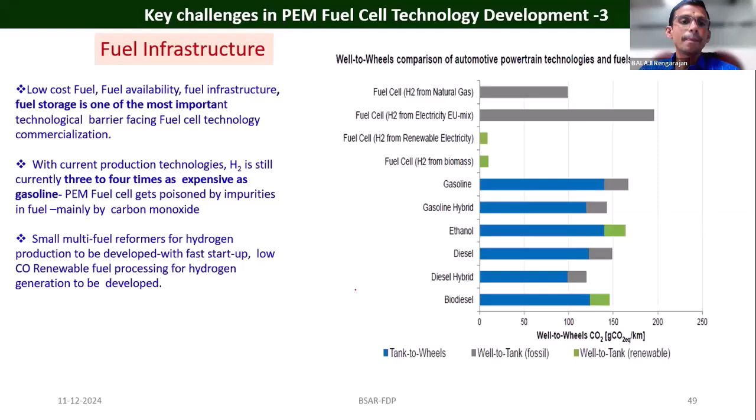And there is always the debate between price and cost. Actually, if you want to introduce a new technology for the commercial market, obviously the profit has to be less so that faster adoption of the new technology will be easier. So we must compromise on price aspects, and considering the cost, we can push this new technology for

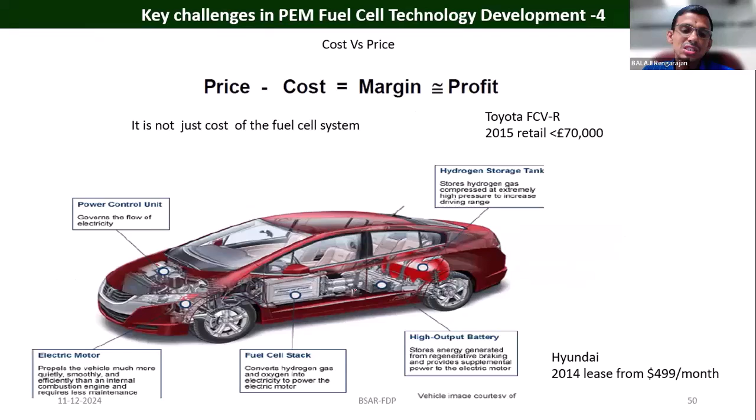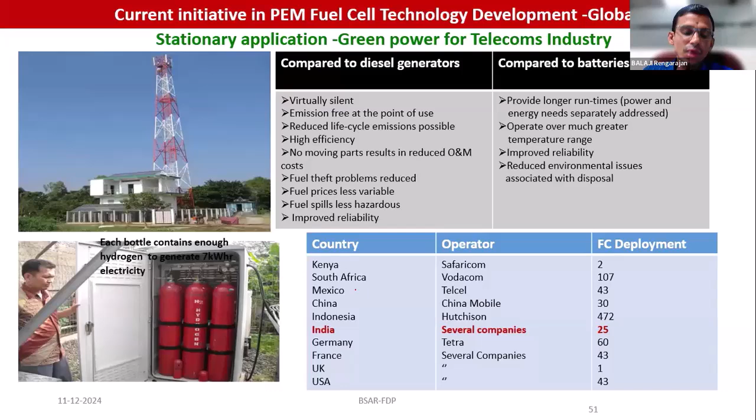the commercial market. And right now, in India, the fuel cell market is for telecom towers, as we discussed, because more than 150 telecom towers operated by Jio are powered through hydrogen fuel cells, because they have an internal reformer which takes care of converting methanol or ethanol into hydrogen. The produced hydrogen is used in the fuel cell to deliver the power. So that is the current market for the hydrogen fuel cell, especially for stationary applications.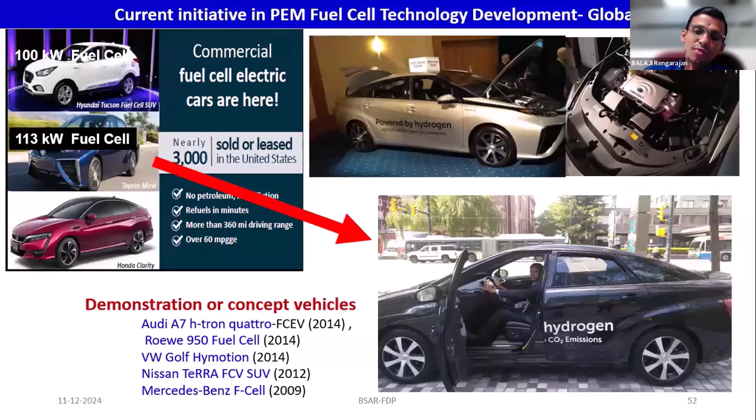So it's quite good. You can see the 113 kilowatt fuel cell, which is on the front side of the vehicle. So it's about a 113 kilowatt Toyota hydrogen fuel cell, which is so compact, and the range is more than 500 kilometers. Even our Honorable Minister Nitin Gadkari is also using these hydrogen vehicles. So it's a kind of faster adoption and realization of the technology for the commercial market.

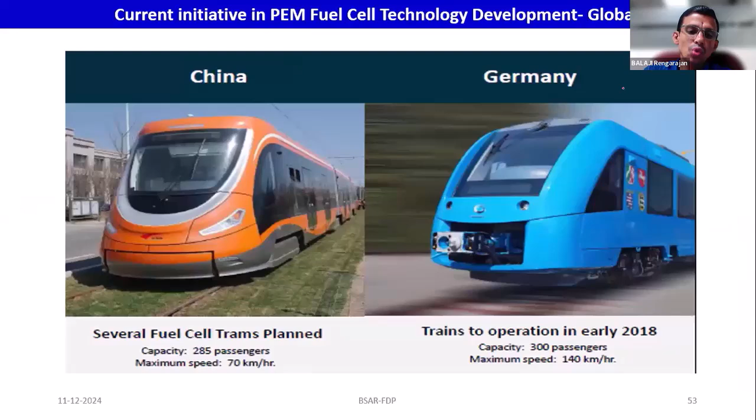And apart from passenger cars, China and Germany are also demonstrating hydrogen fuel cell powered trains, and India is also on the way to a hydrogen train, but not through fuel cells. It's like the IC engine based concept. But soon we can also expect this hydrogen powered train in India. And there are key challenges, as we discussed: the cost and market penetration.

And if all the challenges are overcome, what would be the net energy analysis, whether it's a battery or hydrogen? Because hydrogen, if you consider, is generated from water. So get the power from renewables, split the water molecule, get hydrogen and oxygen and store it. Whenever you require, use this hydrogen and oxygen in a fuel cell, and get power and water again. So this process is similar to the battery charge and discharge mechanism.

So in that case, hydrogen and the battery are both energy storage media. So which one will be better? Obviously we will end up with that kind of question. So there is a kind of analysis based on energy stored on invested. The term represents the ratio between the amount of energy needed to make a 1 kilowatt battery or 1 kilowatt electrolyzer or fuel cell and the amount of energy you get from the device over its lifetime. So that term is energy stored on invested.

If you see this, RHFC is hydrogen obtained from water and used in a fuel cell, again giving water and power. So that is similar to the battery charging and discharging mechanism. Right now, the energy stored on investment for the RHFC, that is fuel cell based, is higher than the battery, because the energy needed to develop a 1 kilowatt battery is more than that for a 1 kilowatt fuel cell. So in that context, the energy stored on investment is higher for fuel cell based electric vehicles compared with lithium battery based electric vehicles.

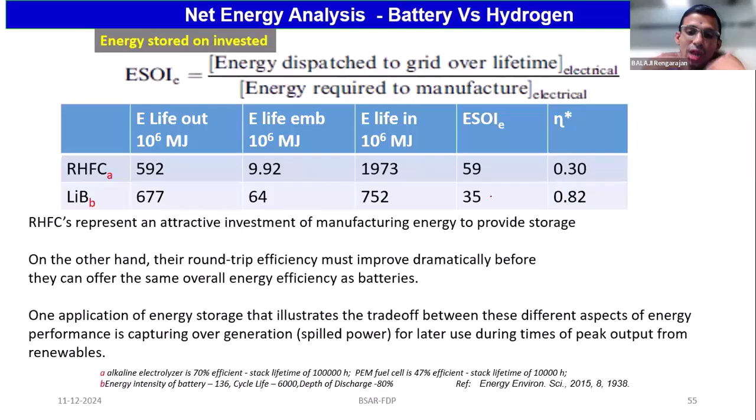Even if it is improved, it may not go beyond 50% or 60%, and 80% is not possible electrically, but considering the carbon footprint, fuel cell electric vehicles will overtake battery-based electric vehicles. Until then, there are many attempts to see whether hydrogen can be used in the IC engine with a small change in the spark plug configuration for power generation. Yes, it can be done, and it has been demonstrated widely.

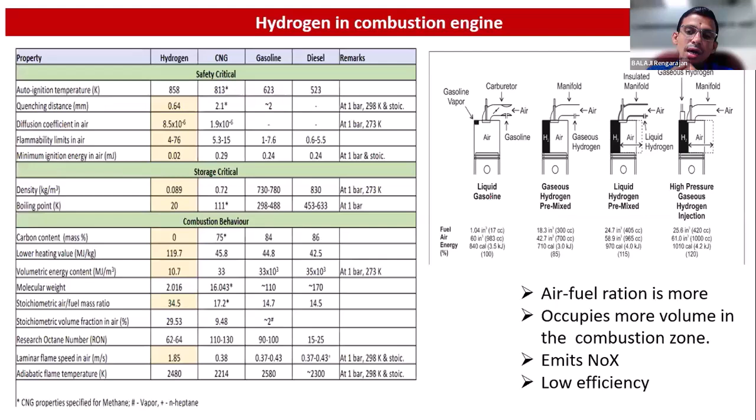Because hydrogen gas is lighter, the combustion volume has to be higher. And one thing you have to take care of is the emission of NOx. Though water is a byproduct, when you have combustion of air and hydrogen, there may be NOx emission, but there are attempts to reduce it, and Ashok Leyland recently demonstrated hydrogen IC engine powered buses.

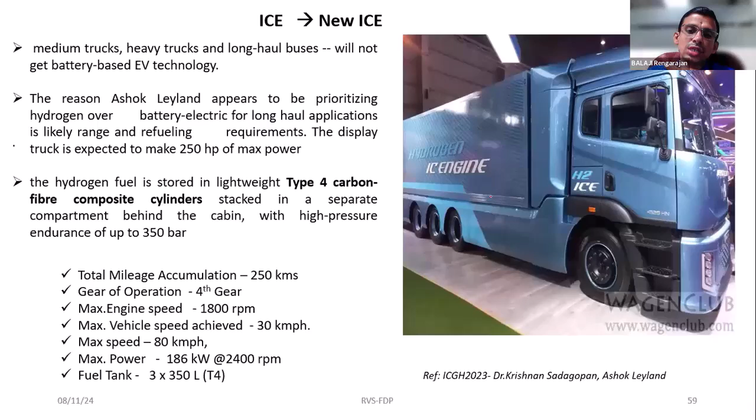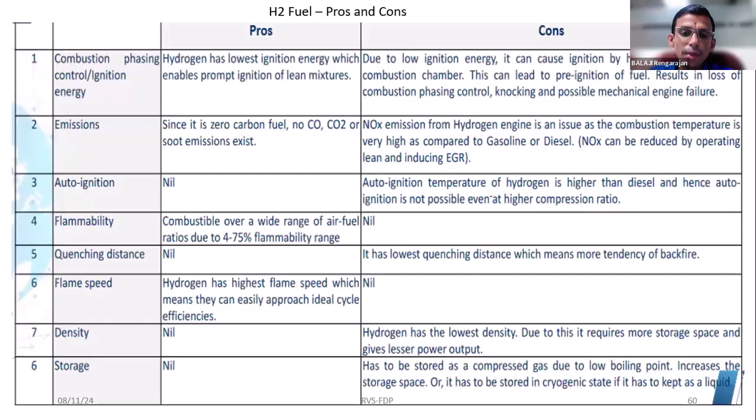They are still conducting various trials, and so far they have run 250 kilometers with hydrogen IC engine powered buses, and they use it for trucks. Long distance trucking does not require high speed, it requires constant speed, so they want to use this hydrogen IC engine concept for long distance trucks, and it is in the demonstration phase. There are advantages and disadvantages to hydrogen powered IC engines and hydrogen fuel cells, but the overall efficiency of the fuel cell will be better than the IC engine.

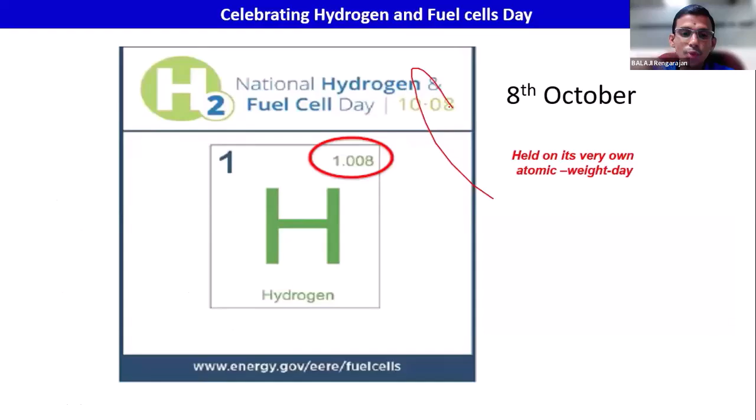Apart from that, there is a need to create awareness among people about hydrogen-based things. In that context, the atomic weight of hydrogen is 1.008, which represents the 8th of October, celebrated every year as Hydrogen Fuel Cell Day. To create more awareness about the technology, we have been celebrating Hydrogen Fuel Cell Day for the past 7 years by conducting various workshops and live demonstrations.

It can create a lot of knowledge and awareness about the technology, so that we can realize hydrogen fuel cell electric vehicles as well as stationary applications in the very near future.